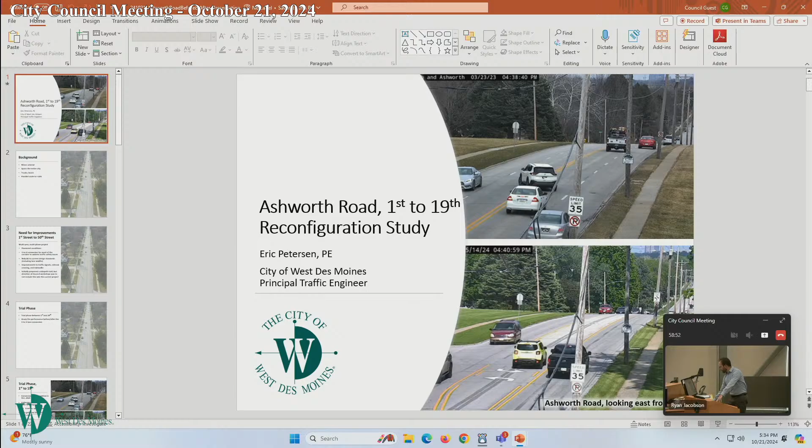Yes, and good evening, Mayor and Council. Eric Petersen, Principal Traffic Engineer. I'm going to go over this Ashworth Road reconfiguration study that we've been working on over the last year since we restriped a portion of Ashworth Road. I'll go through quite a bit, so please just hold questions till the end. I'll probably address some of these as we go farther along.

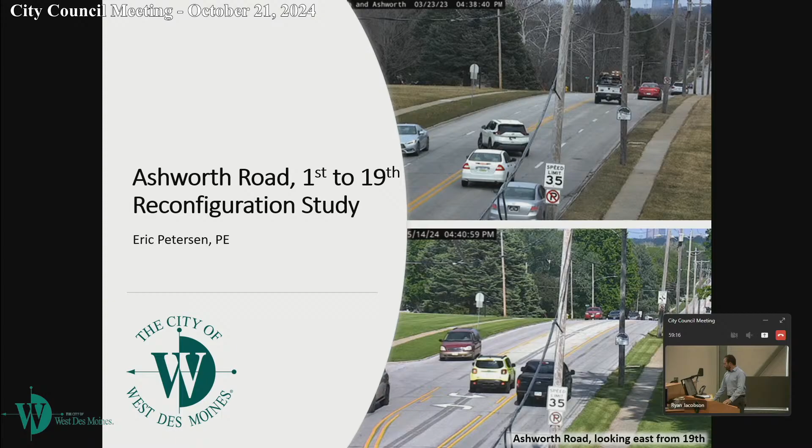A little bit of background on Ashworth Road. We consider this a minor arterial street. It spans the entire city. It's one of the only streets that we have that spans all the way from 1st Street all the way out to 98th Street, going entire east-west like that. Carries a lot of trucks, buses, and a lot of schools in this area, so we see a lot of buses throughout the day using Ashworth Road.

It also parallels I-235, so at times when there's an incident on I-235, we'll see traffic diverting down to Ashworth and coming into West Des Moines that way, or going down to Grand and into downtown Des Moines via Ashworth Road.

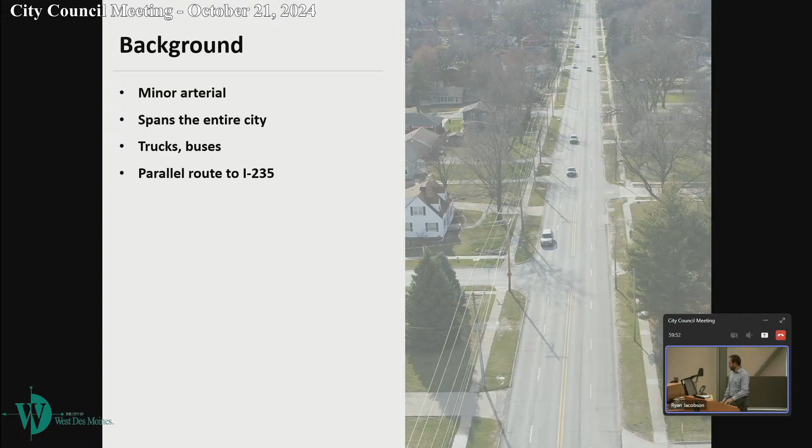A couple years ago, we came forward to you guys and talked about some improvements we wanted to make to the overall corridor from 1st to 50th Street, envisioning a multi-year, multi-phase project addressing some deteriorating pavement conditions that we've got out there. A lot of the pavement sections are past their useful life.

Also looking at a 4 to 3 lane conversion for the majority of the corridor to address some safety issues we have. Also looking at rebuilding to current design standards, so rebuilding sidewalks so they meet ADA requirements, and rebuilding lanes so that they're at least the minimum lane widths. Making improvements to traffic signals, the railroad crossing we have near 1st Street, and again, sidewalks and anything else along the corridor that needs to be upgraded with the construction.

We had initially proposed a side path trail, if you remember, on the north side. Direction at those council workshops 2 years ago was to leave that out of the current project, so we're still showing that out of the current project.

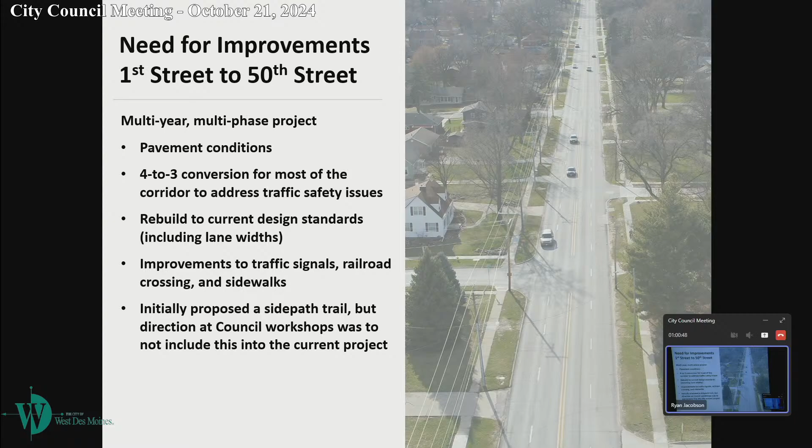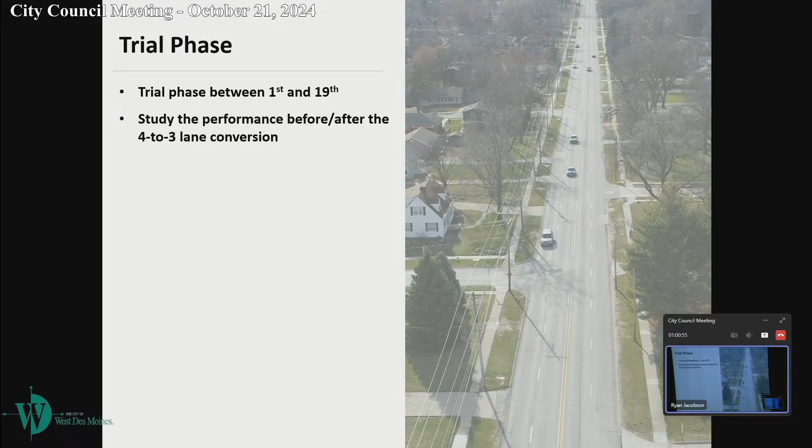After those discussions and workshops, we decided we would do a trial phase, roughly from 1st Street to 19th Street, and study the performance before and after to see will it work as a 3-lane roadway. We converted that almost exactly a year ago, just over a year ago, and looked at several different factors.

We looked at crashes, we looked at speeds, we looked at delay. We talked to a lot of folks that drive it, that live near it, that use it, whether they're bus drivers for the school or for DART. We talked with some of our police officers. We talked with our fire and EMS crews that drive this in emergencies to get their feedback on what's been working better, 3-lane versus 4-lane.

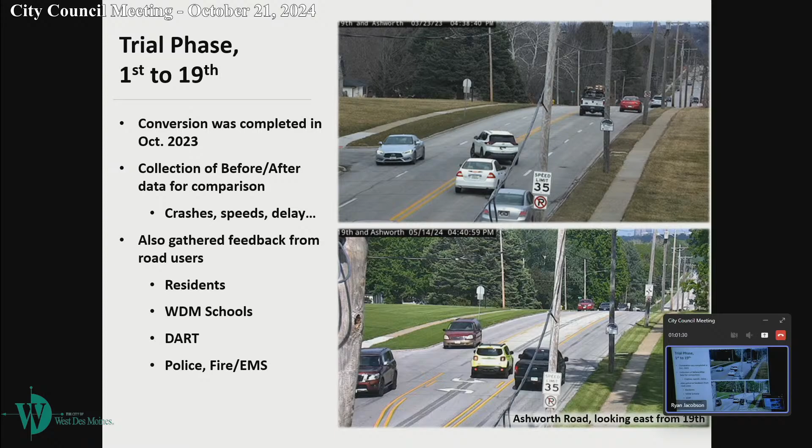There's been a lot of safety research on 4 to 3-lane conversions. So this first section, I'll talk about the crashes. What they're generally finding is that it's really two main things that create a safer roadway with 3 lanes. Number one, you're decreasing conflict points with the fewer number of lanes. And you're also improving visibility of oncoming traffic. Anytime you can decrease conflict points and improve visibility, you're going to make a road safer. The safety research is very clear on that.

There's a mountain of safety research available out there. In the traffic engineering industry, it's generally common knowledge that a 4 to 3 lane conversion is going to make things safer overall for a roadway.

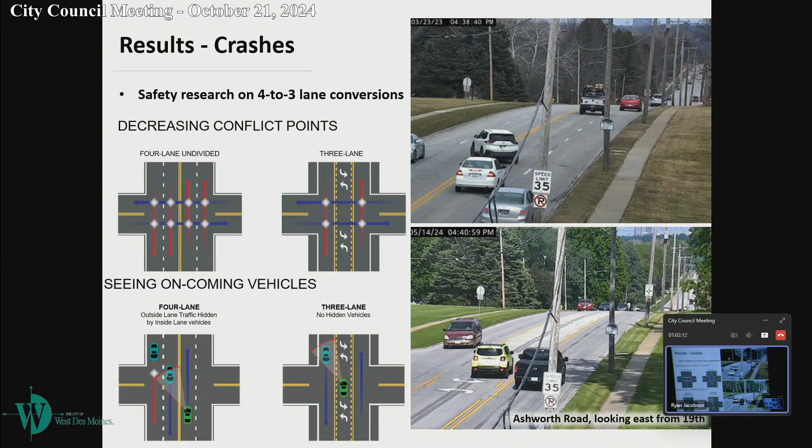We looked at the data from Iowa DOT as well as crash reports from the West Des Moines Police Department. We've got over 10 years of data on this corridor, on anything that's been reported from 1st out to 50th Street. One thing I will note is that it doesn't include unreported crashes. So if somebody gets into an accident and they don't report it to the police, there'd be no way of knowing that crash ever happened.

Also, if something happens like 2 vehicles strike mirrors, we hear that a lot in these narrower lanes, it's going to be no injuries, very little damage. Those might not even be getting reported to us. So we may have no idea how many crashes. We know they're happening, but we have no way of measuring how many crashes are actually happening out there if they're that minor.

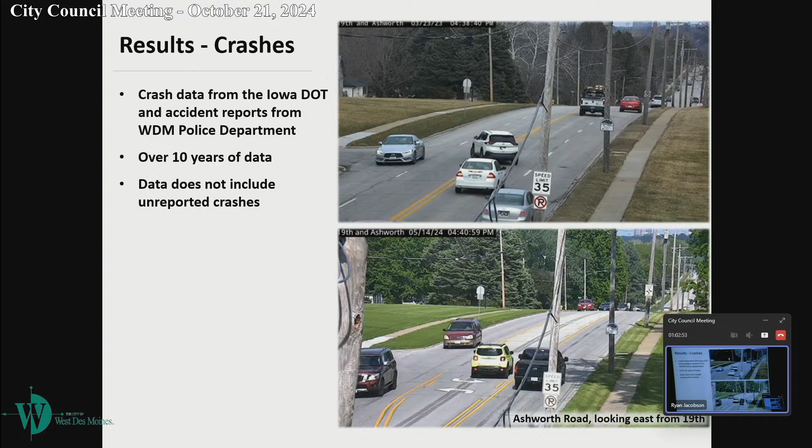Typically, when we do a before and after study like this, we like to remove those extremes, those outliers that could skew things. So we'll typically take out situations like a blizzard condition crash, or somebody hitting a deer, or an OWI type crash, some other abnormal situation. I know on this stretch we had a case years ago where there was a road rage incident and somebody purposefully ran into somebody. Those types of crashes we remove because they're not really normal conditions, and we really want to compare true apples to apples.

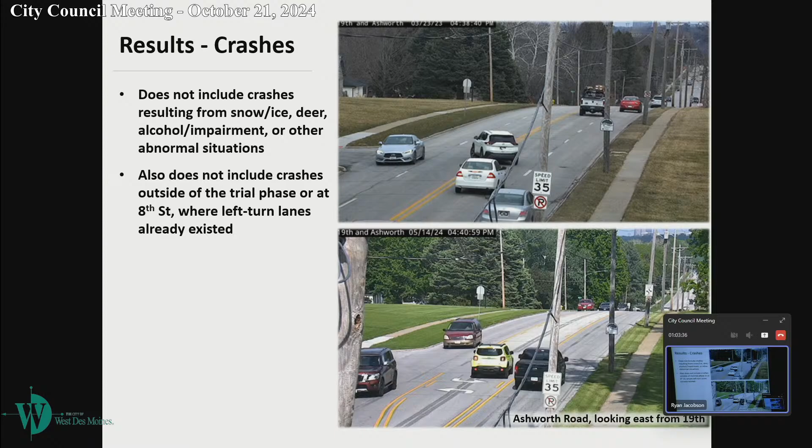We didn't look at outside of the trial phase, where we were transitioning them to 3 lanes, or any point out of that. We left that out because we wanted to look at the 4 to 3 lane, in those same sections, to see an apples to apples comparison on crashes.

What we found is before, when it was just a 4 lane, we were averaging about 7 crashes per year over that roughly 9 to 10 years of data. On average, we were seeing 2 to 3 of those crashes having injuries. When we looked at those crash reports, we could see that about 40% of them were due to either having that narrower, tighter geometry or having no left turn lane, which could be contributing to those crashes. In the 1 year after, we've had 4 crashes with 3 lanes.

When we look at those 4 crashes, it wasn't due to the 3 lane, it was just standard rear end crashes, somebody didn't yield to somebody, and none of those crashes resulted in injuries. It's only been 1 year of after data, and typically we like to see more than that, but looking at that 1 year, it definitely indicates crashes have been reduced with the 3 lane. I also want to note that if we were to go back and include those OWI crashes and extreme examples, you still see the same reduction.

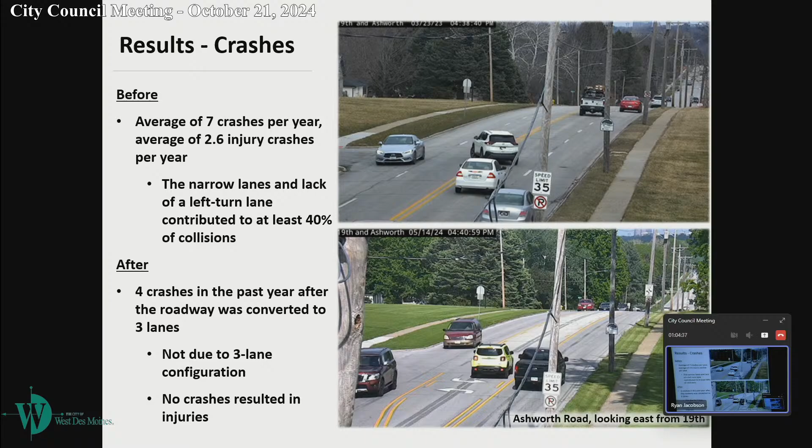We also wanted to look at speed on the corridor, and generally research has shown a decrease in speeds when you go from a 4 lane to a 3 lane conversion. So we wanted to go out there and test that. We set up the same speed data collectors at 2 different locations before and after the road was converted.

What we found is that speeds are slightly lower at both locations for the 3 lane configuration. Your average speed and 85th percentile speed were about 1 to 2 mile an hour different, which doesn't seem like a lot. But when we looked at those excessive speeds, the percent going more than 5 over, more than 10 over, more than 15 over, those are where we really saw some reductions. That's where a lot of times crashes come from, that mix of high speed versus low speed traffic mixing together, so seeing that reduction in excessive speeds was really promising.

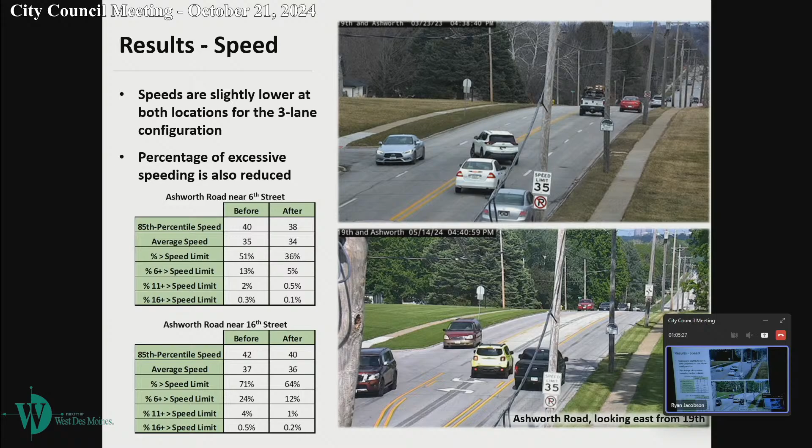In terms of traffic flow, we've got really good visibility of this whole corridor. We have traffic cameras at 1st, 8th, and 19th Street, so we can see the whole corridor. The cameras here on the right are from 19th looking east. We recorded multiple days and times, during the school year and during the summer months, to get an idea of different times of day and different ways the road was operating. We also had multiple drive-throughs and field observations, actually being out there witnessing it.

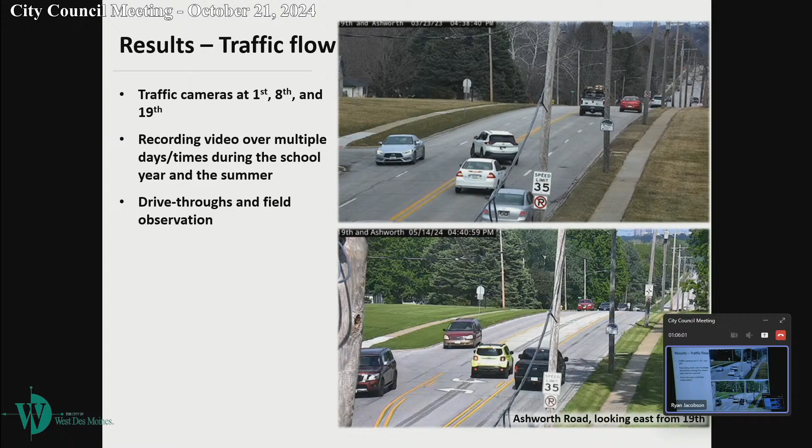So before, here are some pictures of what we were seeing a lot. A lot of times you see issues with the narrower lanes, buses and trucks having a hard time staying in their lanes. These buses are about 8.5 feet wide, not including the mirrors, so when you include the mirrors, now you're about 10.5 feet wide on a bus. They had a really hard time staying in their lane.

You'd have people passing these buses who'd have to go across the double yellow center line into oncoming traffic to get around these larger vehicles. We also saw a lot of times people turning left off of Ashworth Road backing up cars or causing conflicts because they're stopped in a through lane on the inside. We saw one instance where a fire truck was going through on an emergency, straddling the double yellow center line, trying to get through traffic as they tried to get to the outside.

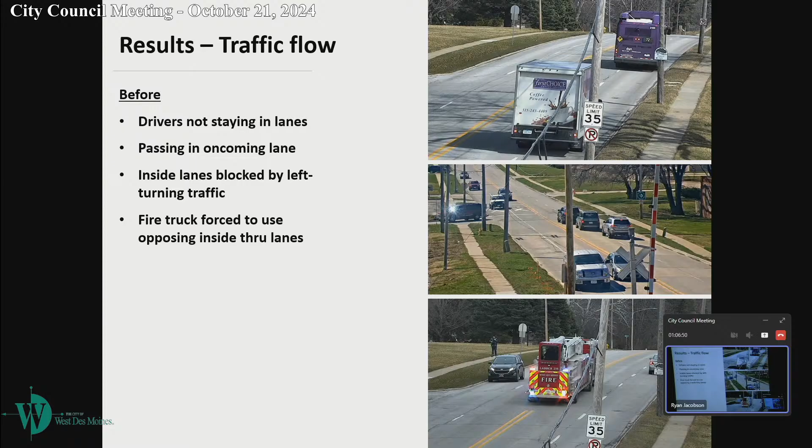And of course, drivers are better able to stay in their lanes. So we didn't notice all those instances of buses getting out of their lane or people passing in oncoming traffic to get around.

One thing we did notice at the transition zone at 19th Street, we had to temporarily modify lanes there to get the 4 lanes to transition to 3 lanes. We did see a couple instances where people were going eastbound in that outside lane, signed and marked for right turn only, but they would keep going straight and create some potential conflicts there as a result. We didn't have any crashes of that sort, but we did notice that happening. Signs and markings are all there, but you're relying on that to guide traffic to get over and then come back, so it's only temporary. It's not really an issue with the 3-lane, because it's purely just a temporary setup for this trial phase.

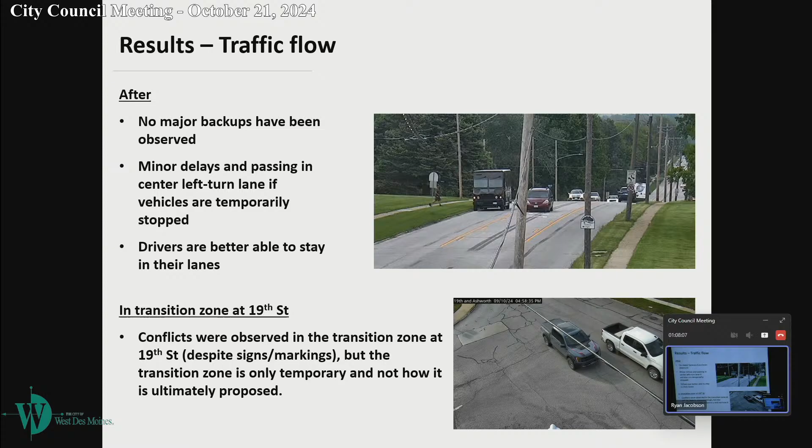We also looked at the capacity of the roadway. A 3-lane road generally can handle about 15,000 vehicles per day. So a roadway like Ashworth Road, with traffic signals like this, is about 15,000. Currently for this stretch between 1st and 19th, we've got roughly 7,000 to 9,000 vehicles per day, so we're below that. And if we were to account for future traffic growth in this area, you might say, well, this is a mostly developed area, where's all that traffic going to grow from?

When we're seeing that, we're talking about the pandemic. We're still seeing some rebound effect from that, still not quite up to the level we were before COVID. We're also seeing more redevelopment and infill in the area. The Val Gate district, for example, is redeveloping, and more of those areas are going to start redeveloping. So we do expect traffic volumes will grow a little bit. They're not going to go wild, not going to double or triple out here by any means, but it will grow.

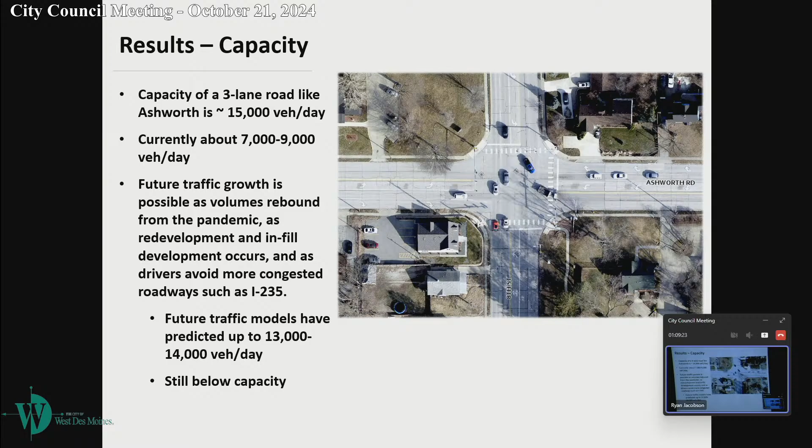We also know that as I-235 gets more congested in the future, more and more people are going to say, you know what, I'm not going to go on the interstate, I'm going to take a little bit longer and use the city streets. And Ashworth Road is one of those parallel streets. So looking at 11th to 19th, we're seeing anywhere from 13 to 14,000-ish vehicles per day on this stretch, still below that overall capacity of the roadway.

A lot of times where you're restricted is at your signalized intersection. So we wanted to look at 8th and Ashworth, which previously had 2 through lanes east-west. When this was modified, it went down to 1 through lane east-west plus a right turn lane for eastbound and westbound traffic. We were able to restripe that and get it to operate this way, and we wanted to look at how that was functioning.

We've got traffic analysis software that we use to analyze things like delay and capacity. So we used that software under different scenarios, including morning rush hour, afternoon rush hour. We looked at a morning rush hour when there had been a crash on I-235, and we saw that extra traffic coming down. We also looked at future conditions, looking at what happens when that extra growth in the future comes and hits Ashworth Road - can it still handle that? What we were seeing is that we were seeing slight increases to delay when we did a 3-lane road, but still within a reasonable range, even when adding on that extra traffic.

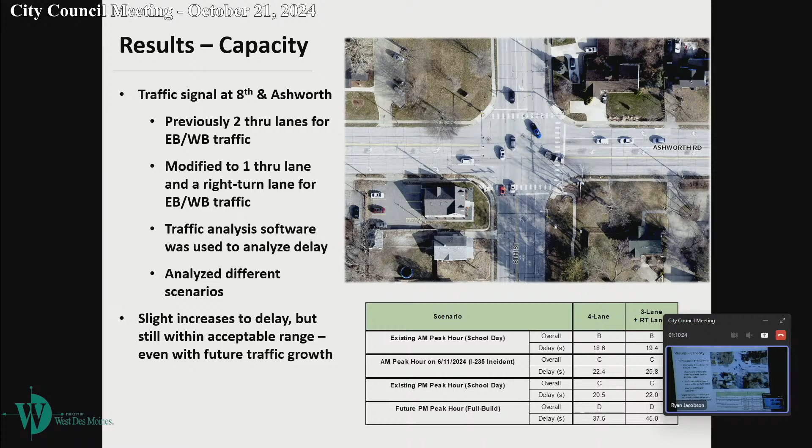We also spoke a lot to the public - we'd take phone calls, emails, they would talk to us on different projects and say, hey, by the way, Ashworth Road. So we would hear a lot about the project, and most of what we've received has been very, very positive. When we've talked to residents, drivers, bus drivers, emergency responders, they've been pleased with the 3-lane configuration. They prefer the 3-lane over a 4-lane configuration, including a lot of residents who came to the public meeting about a month ago who said they were initially opposed to the project and didn't like the idea of a 3-lane, and now they actually prefer the 3-lane roadway.

Of the few negative comments we did receive during the course of this year's study, most of them were actually related to the lack of a side path trail. They really said, man, it would have been really nice if we could have gotten that side path trail in there on the north side. So in full transparency, I wanted to add that in there as well. But that was the most common negative complaint we received - not really a complaint about the 3-lane, more just that it'd be really nice if we would have had that trail.

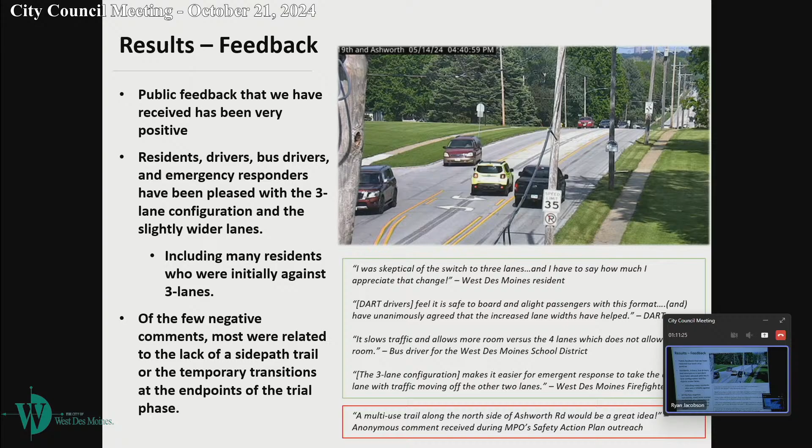Our findings are consistent with what we're seeing locally around Iowa and nationally on 4 to 3-lane conversions. When you talk to the Iowa DOT or Federal Highway, they call it a proven safety countermeasure. That's their quote, which is really great when we're looking at how we're going to pay for improvements to Ashworth Road.

It makes it a really great candidate for federal and state transportation grants, and it looks really good on applications when you've got a 4 to 3-lane conversion as part of it.

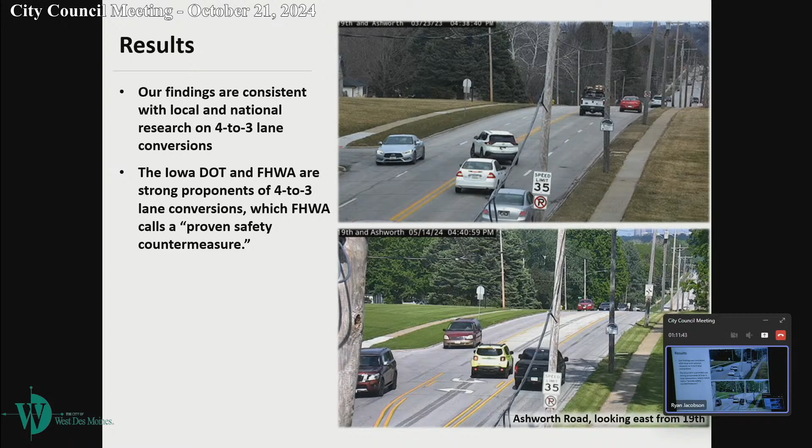In fact, over the last couple of years we've gone after STBG funds through the MPO, Surface Transportation Block Grant Funds, and we've been awarded $4.5 million already towards the Ashworth Road project to reconfigure and reconstruct this road. Out of all the STBG applications submitted across the metro, from Des Moines, Ankeny and Waukee, our project here on Ashworth was the highest scoring project out of all of those the last 2 years, and the 4-3 lane was a big part of that score.

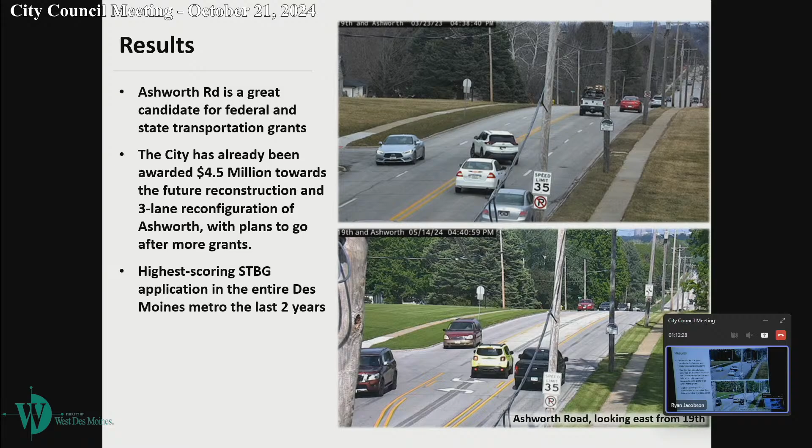So looking back at the past year, we would say that the 4-3 lane conversion was a success. The trial project that we did was successful. We've seen fewer crashes than the average we'd seen before, lower speeds, especially those excessive speeds, and although we saw slightly more delay at the cross streets, we had enough capacity to still move traffic at acceptable levels. Most of the public feedback we've received has been in favor of the 3-lane.

We know that not everybody is going to be in favor of it. Some people still won't be convinced, may never be convinced. But looking at it, what's the best thing to do? What's the safest thing to do? What's the thing that sets us up best for grant money? It's going to be the 3-lane configuration.

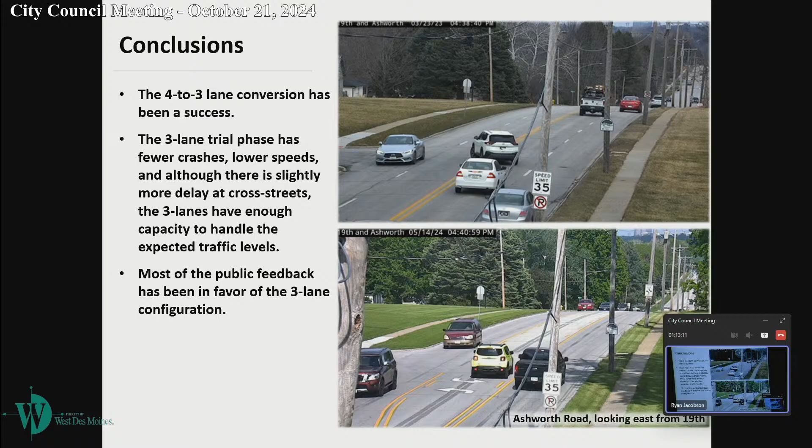So that's what we're still recommending for Ashworth Road, generally from 1st to 50th. The traffic volumes from the stretch you're looking at here on the screen, from 11th to 19th, are very comparable to the section we have from 22nd to 50th. So we feel very confident it will still work in those other sections to the west.

The only section is 19th to 22nd, where our volumes do go up quite a bit because you get a lot of that northbound, southbound traffic that weaves through there and uses Ashworth for those 3 blocks to go north or south. So of course we will need other improvements like I talked about before, but the 4 to 3-lane conversion is a vital aspect of that overall project.

So with that, I'll open it up to any questions you might have for me.

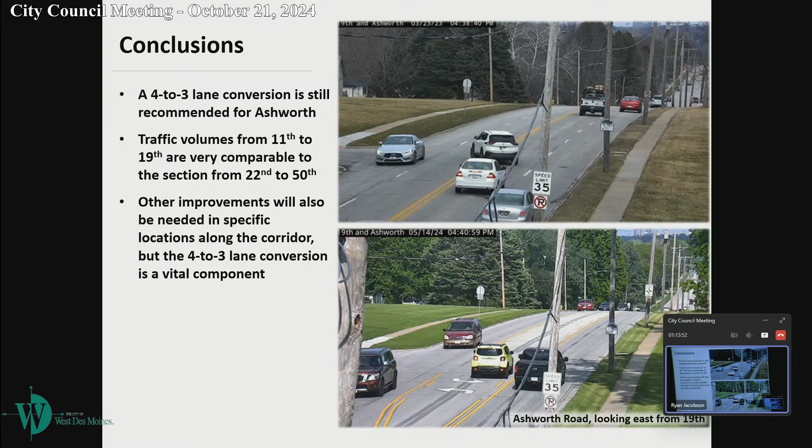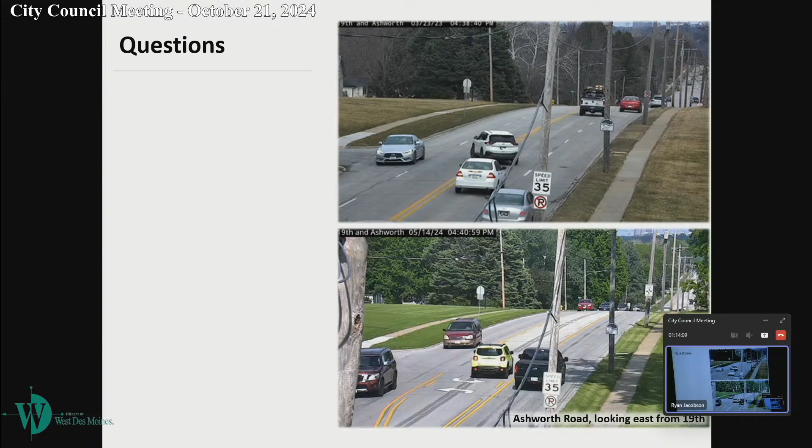What is the plan for First Street down by Val Air? I've heard from several residents that when Val Air Ballroom is having an event down there, traffic is horrible. How do you get through when everybody's in the westbound lane coming off of First Street to go into Val Air, and then they're in the turn lane coming east to go into Val Air? So how do we get traffic moving in those situations? Because with all the improvements Val Air has done, we're going to see even more events down there, which was their goal and the goal of the city. So how do we handle that?

Anytime we have an issue like that, whether it's Val Air or a school where traffic is backing up from their internal site onto the roadway, the first thing we try to do is go to that property owner and work with them to see what we can do to help get them in easier and faster so we don't have that issue at all. I've actually talked with the general manager of Val Air, and we had a good conversation about how they're adding in their gates. Their gates weren't fully in yet, and that was causing some delays for them.

They are feeling like once they get their gates fully operational, that will help speed things along. I think they've also gone to a new ticketing mechanism through an app, where you can scan and get in easier. So I think some of it is just people learning what they need to do and where they need to park.

What gates are you referring to? They have admission gates that raise up so you can let traffic in. I haven't been there to know exactly how it works, but my understanding is they've got gates internal to the site installed over the summer. Before they had somebody standing there taking money for parking. Now they'll have a gate system where you scan, the gates open up, and they can go in a lot faster. That's what he explained to me.

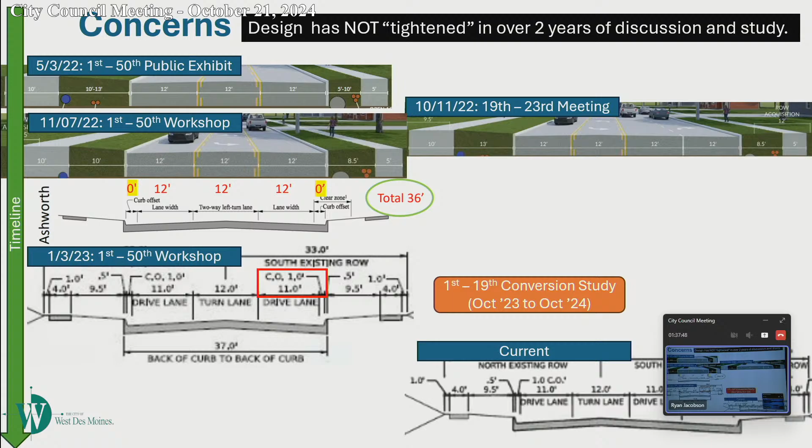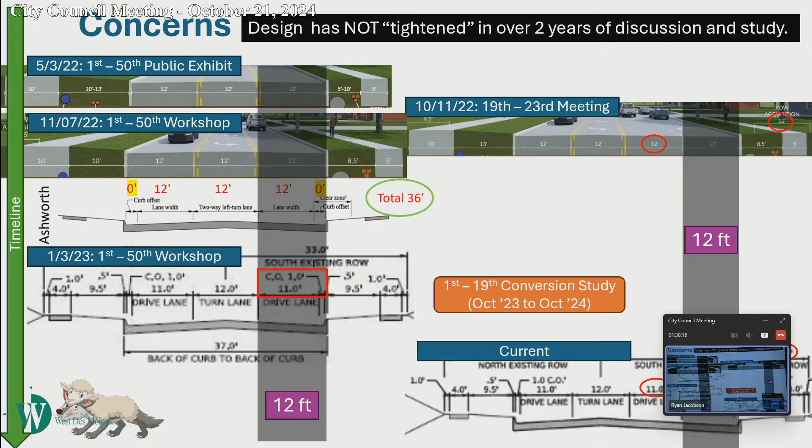We'll talk about some literature in a bit that indicates there might be more opportunity to get off this fixation on 12-foot lanes, to narrow it and still be safe. That is critical, we are still going to maintain safety through this roadway. There's been some literature discussed lately that supports being creative, being innovative, being consistent with modern design standards, including recent research indicating that narrower lanes are safe.

So the impact right now as it is, taking 12 feet is devastating to many of these properties. If you look at how much it takes, it's 1/6 of the frontage. We don't have a road to park on. This is where we put our family and friends when they come over. That's gonna be gone, trees are gonna be gone.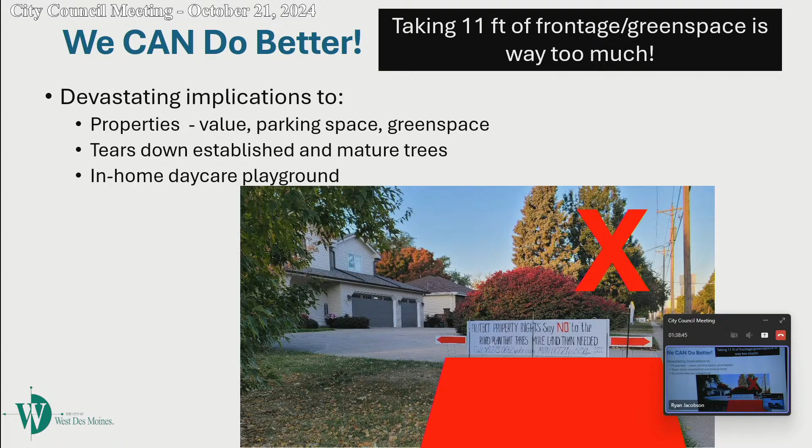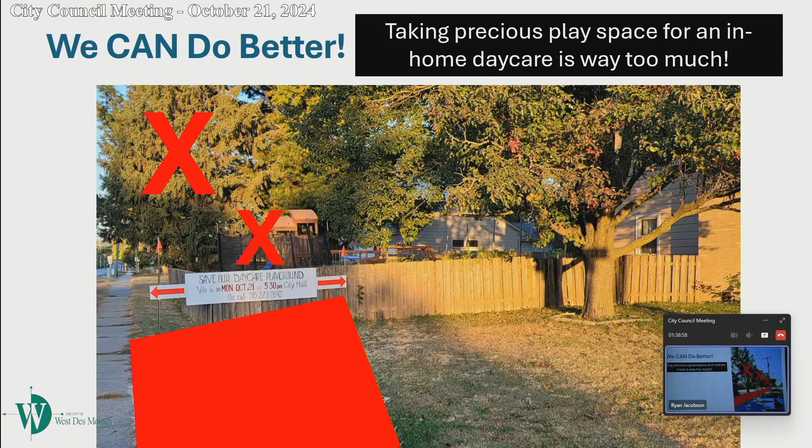Again, family not able to park when they come over. Trees that have matured and make this road beautiful are going to be gone, taking this much land. A daycare is going to be destroyed, the playground, with this plan ravaging through 11 feet into that property. It is very destructive right now, and I truly believe we have an opportunity to work together. I've already worked on this and heard some great things from engineering about these opportunities.

Can we all come together? Can we all collaborate to do this?

Context-sensitive design is what's being recommended by the Narrow Lane Save Lives study. I've sent this to everyone. They suggest instead of using 12-foot lanes, start with a standard of 10 and work up from there based on need.

We probably do need some 11-foot lanes in here, but we could use 10-foot lanes as a turn lane. We could use as low as 9-foot lanes for right turn lanes. We can be more creative.

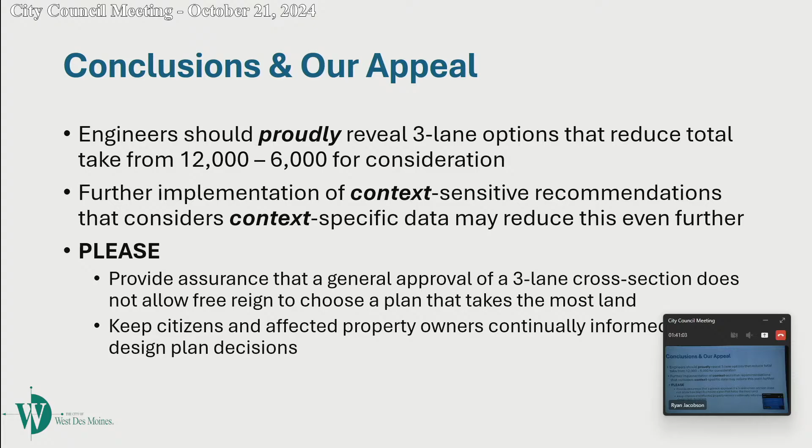I'm here tonight to address the ongoing discussions about the proposed widening of Ashworth Road. I used to be a critical care nurse, I'm retired now, but we used evidence-based practice, and I believe the engineers also have that in their wheelhouse. I wouldn't have the engineers tell me how to be a critical care nurse, and I'm not going to tell them how to do their job.

I may not be an engineer, but I trust that the city's engineers are acting in the best interest of all of us. Just look around our beautiful city—it's thoughtfully planned, and it's clear that careful consideration has gone into making it a place where people want to live and work. That's why changes to lane configurations are sometimes necessary. The 9-foot lanes on Ashworth may have been appropriate years ago, but traffic volume has grown significantly since then. Ashworth may seem like a minor east-west corridor today, but that could change dramatically in the next 20 years.

Since the pilot conversion, even though I'm between 19th and 22nd, I have noticed a change. I'm right there where traffic used to build up during rush hour and I couldn't get out of my driveway. This past year, it's not backing up past my driveway anymore, and I can get out easily going eastbound or westbound.

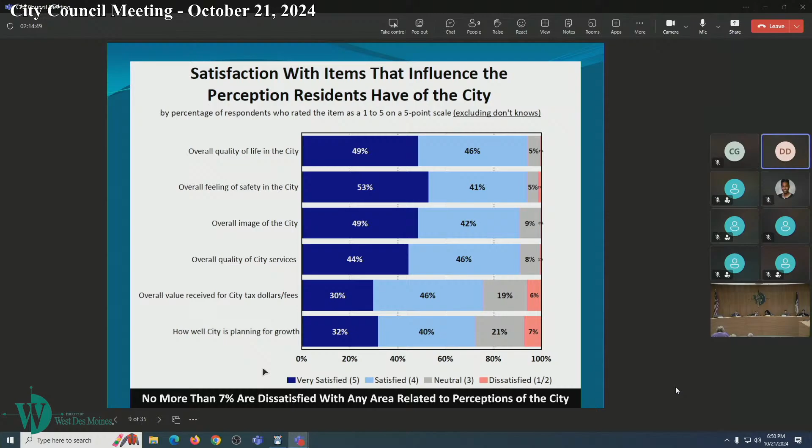Looking at overall satisfaction with major categories of city services, the majority of residents were satisfied with all city services.

Major finding 2: residents in all areas are satisfied with the overall quality of city services. When you look at the map of the city here, all areas in blue indicate that residents in all parts of the city were satisfied—this one showing overall quality of city services, as well as overall quality of life in the city.

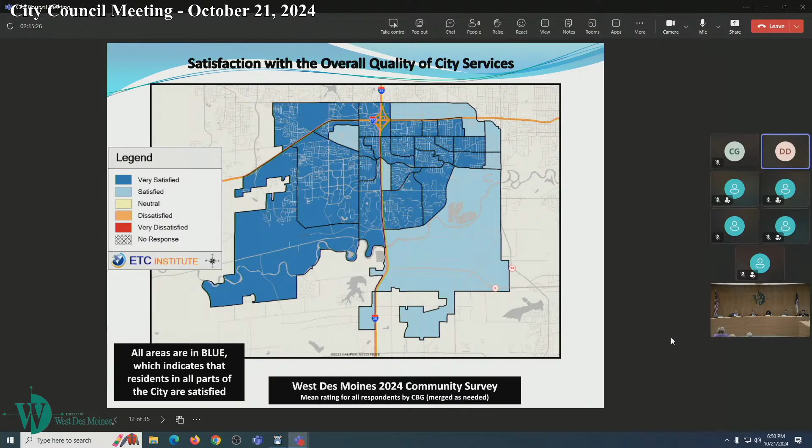Major finding 3: satisfaction with city services in West Des Moines are among the highest in the nation. A lot of blue arrows on this chart, meaning significantly higher than the national average and the Plains regional average, for overall feeling of safety in the city, image, quality of city services, value received for tax dollars and fees, and how well they're planning for growth.

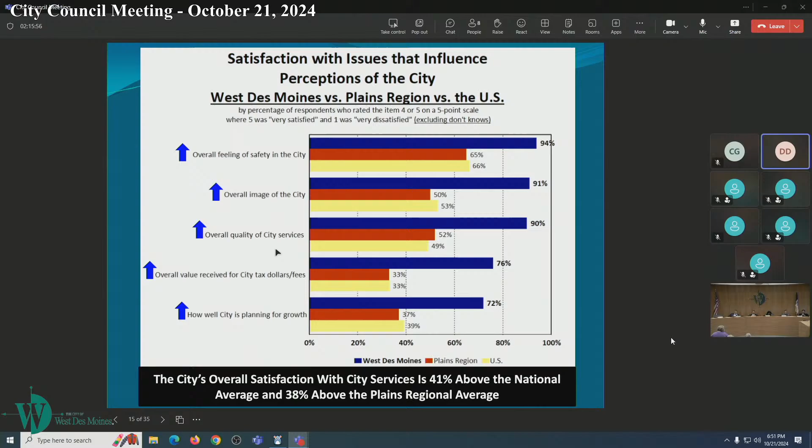Looking at major categories of city services again, all categories rated significantly higher than the national and Plains regional averages. Public safety services, parks and rec programs and facilities, and customer service from city employees would be in the top 3 in this category.

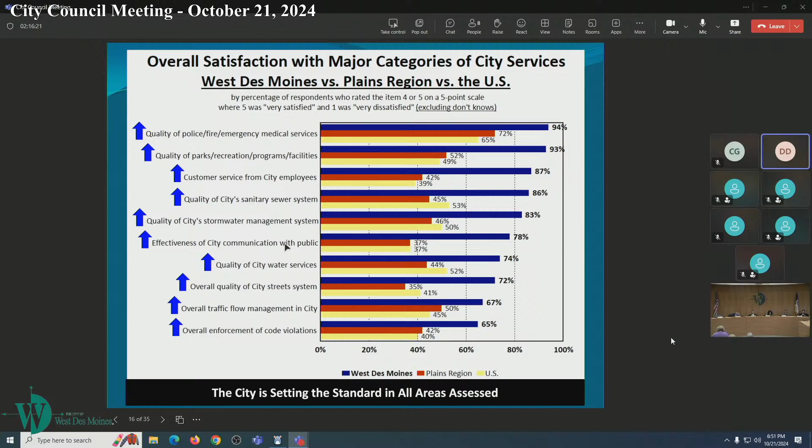Public safety again shows significantly higher ratings than the national and Plains regional average. Quality of local fire protection, emergency medical services, and quickness of firefighters and emergency medical to respond to emergencies rated the highest.

City maintenance: maintenance of city buildings, curbside trash collection, city parks, and cleanliness of city streets were among the highest with regard to city maintenance.

Communications: availability of information on city programs and services, quality of the website, and public involvement in local decisions were all significantly higher than the Plains and national averages.

When looking at the trends, the most notable increases since the last survey in 2022 include online services offered on the city's website, up 10 points from 2022; enforcing maintenance of business property; availability of information on city programs and services; quality of the city's website; traffic circulation in parking lots with regard to new commercial development; and traffic circulation between developments with regard to new commercial development—all up 5% or more than in 2022.

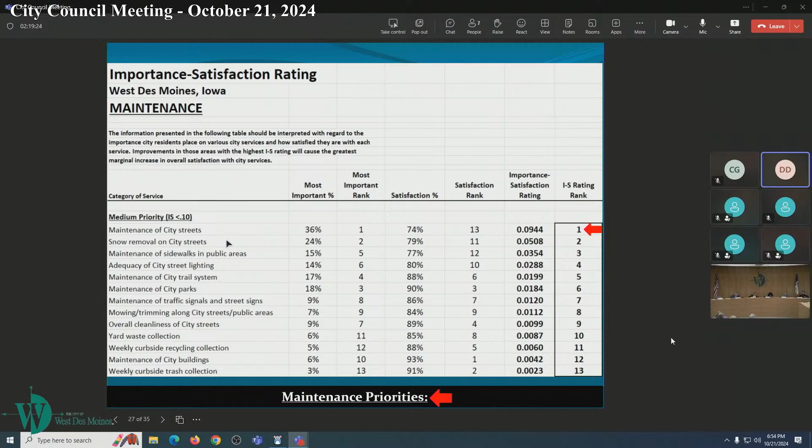Maintenance of city streets was the top medium priority for this category. Looking at other findings, initiatives most important for the city's police department to emphasize, top 3: additional residential patrolling by officers, additional police problem solving in neighborhoods, and neighborhood watch or business watch.

Sources residents have used during the past year to get information about the city: WDM magazine was on top, and city website came in a close second. When looking at what is needed most in neighborhoods, 20% said more enforcement of traffic laws, and 20% said more enforcement of property maintenance codes.

Benefits of economic development that are most important to residents: better lifestyle amenities, more jobs in the region, and new companies opening in the region were in the top 3. The types of employers or businesses residents would like to see expanded or located in West Des Moines: finance and insurance services, healthcare, and retail were the most mentioned.

To summarize, residents again have a very positive perception of the city. 95% are satisfied with quality of life in the city, and 90% are satisfied with overall quality of services provided. When comparing to other communities, the city of West Des Moines is setting the standard compared to the U.S. average and the regional averages. The priorities for improvement over the next 2 years are traffic flow management, quality of the street system, and enforcement of code violations.

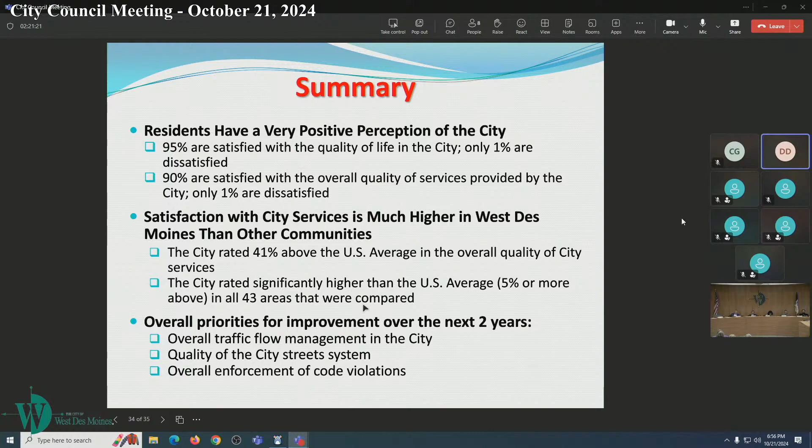Dawn, I want to thank you so much for walking through this. You did a great job going through it. We appreciate the job that you guys do every single year. I know that myself and the council will take a much deeper dive on this in the months to come. We're always happy to see that we have super high satisfaction from our citizens, but I know this council, and I know we want to look at some of the areas where we're not scoring as high and see if we can focus on trying to get that up as well. So thank you so much for everything you do.

Really appreciate it. And with that, I would just say have a great night. Thank you, you too, and I appreciate the opportunity to present this time. Okay, thank you so much. Take care. Thank you. Bye-bye.